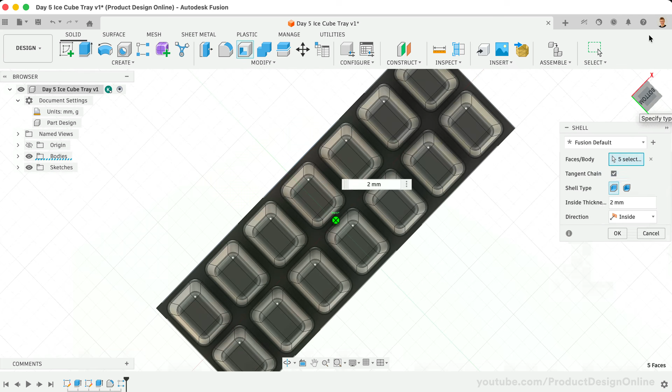I'm Kevin Kennedy, and this is day 5 of Learn Fusion in 30 days. Today, you'll learn a secret trick with the shell command, how to remove material from 3D objects, and how to taper an extrude. Let's get started.

Start with a new part design file and save your design. For some projects, such as this ice cube tray, you may find it easier to start with a 3D block, then remove material to create the final shape.

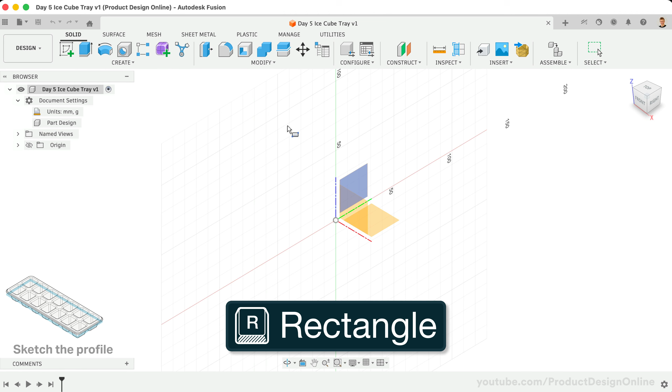Activate Rectangle with the shortcut letter R for Rectangle. Select the bottom origin plane, as we'll sketch this ice cube tray from a top view. Switch to the center rectangle type in the sketch palette. This allows you to start from the center origin. Later in this lesson, you'll see that using the center rectangle allows you to leverage the origin planes to sketch the outer lip of the tray.

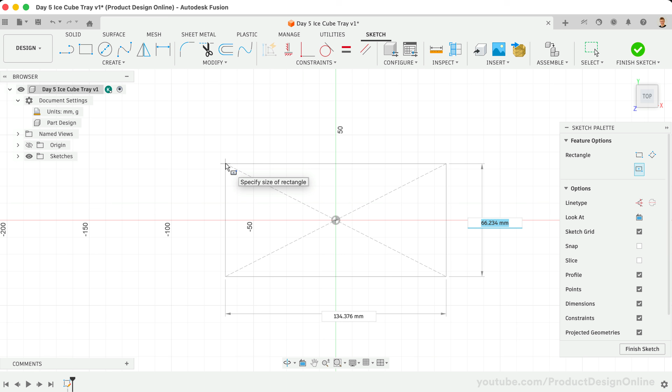After clicking the origin to start the rectangle, type 104 mm for the width, press Tab to switch inputs, and type 300 mm for the length. Click to place the rectangle.

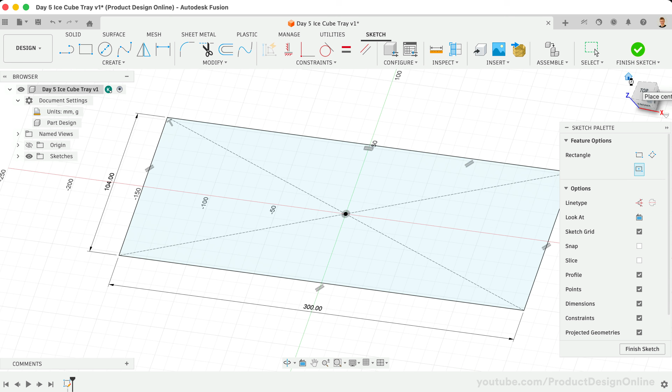View the model from the home position so you can see the extrude. Activate Extrude from the Solid toolbar or with the shortcut E for Extrude. Define the distance as 50 mm. This will represent the overall height.

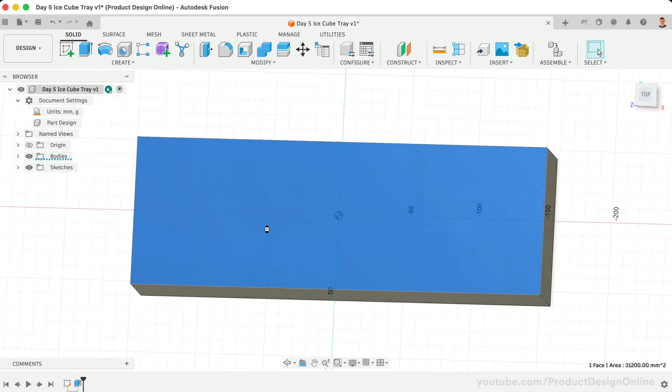We're now going to create the first ice cube cutout, allowing you to pattern the remaining ones. Right-click the top surface and select Create Sketch. Activate the Rectangle tool again, but this time leave it as the 2-point rectangle. Start the rectangle without worrying about the location.

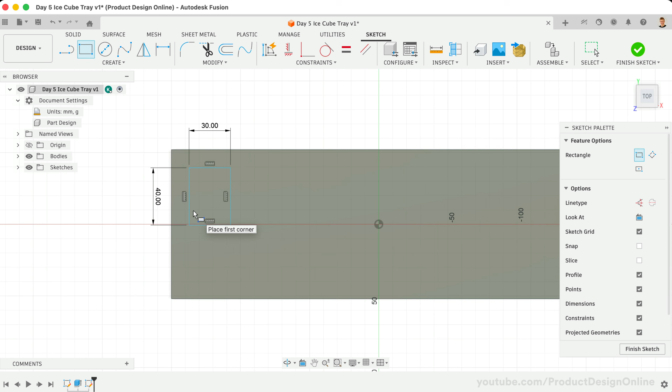Define the height as 40 mm and the width as 30 mm. Click to place the rectangle. Our active sketch is not yet fully defined. Press Escape to clear the rectangle command. Notice you can still click and drag the rectangle.

Use sketch dimensions to precisely place the rectangle from each edge of the tray. Activate the Sketch Dimension tool from the toolbar. A sketch dimension requires you to select 2 sketch curves and then define the distance or angle between them. Select the top of the rectangle followed by the top edge of the 3D body. Remember from the toy block on day 1, you must place the dimension.

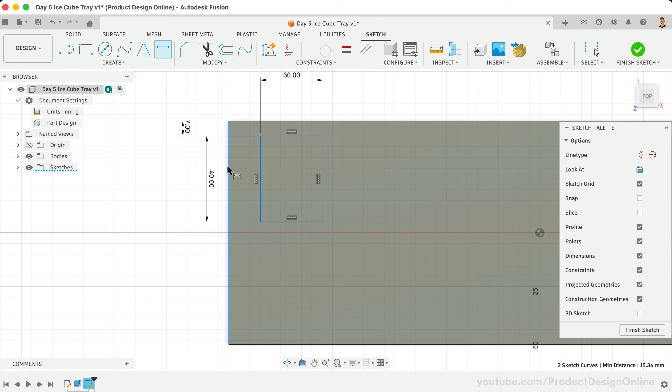Drag your mouse to the left and click to place the dimension. Type 7 mm for the distance. The Sketch Dimension tool remains active. Select the left edge of the rectangle and the left edge of the 3D body. This time, place the dimension above.

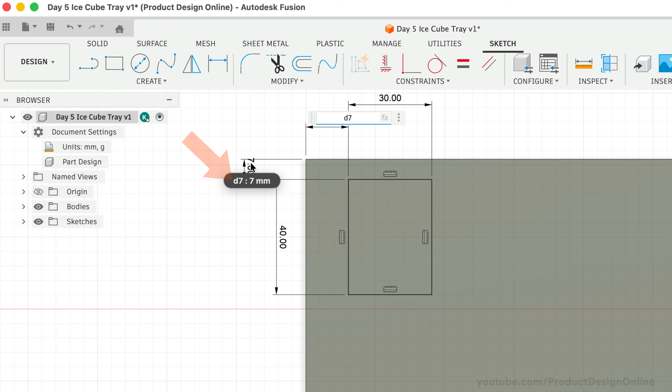Here's a pro tip: in cases where you want the same dimensions, you can select the Other Dimension field. Notice this action fills out the dimension input with D for dimension, followed by a number. This number reflects the sequence in which the dimension was created and can be used to reference the value elsewhere. Press Enter and notice the dimension says FX 7 mm. The FX represents a function where the software pulls the 7 mm value from that original dimension.

For example, if you change the left dimension, notice the top changes as well. This works great for achieving a uniform distance between 2 adjacent edges. Leave this set to 7 mm.

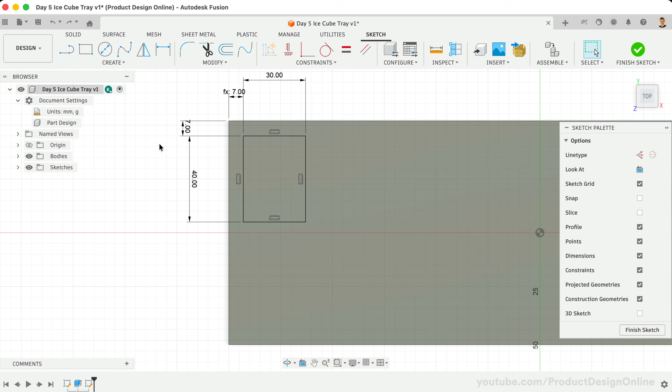We'll now use Extrude to cut this out. Activate Extrude with the shortcut E for Extrude, and view the model from the home position. This makes the extrude easier to see.

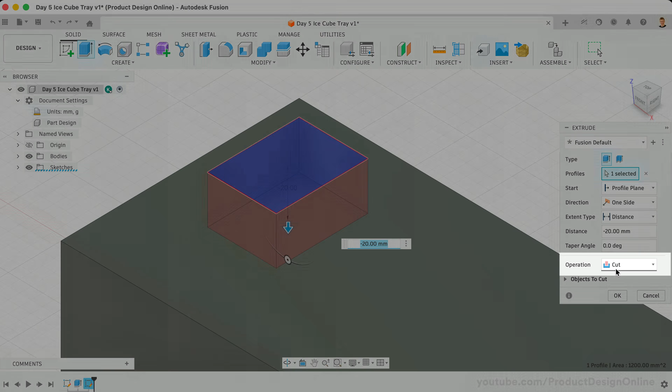Remember, since you have more than one profile, you must select the profile to extrude. If you drag the blue arrow into any existing 3D body, a red preview indicates which area the software will cut away. The operation automatically changes to Cut in the Extrude dialog. You can manually change this at any time if it does not change automatically.

Define the distance as -30 mm. It's very important to keep the minus symbol to make this cut into the existing 3D body. Removing it creates a new 3D body above the tray.

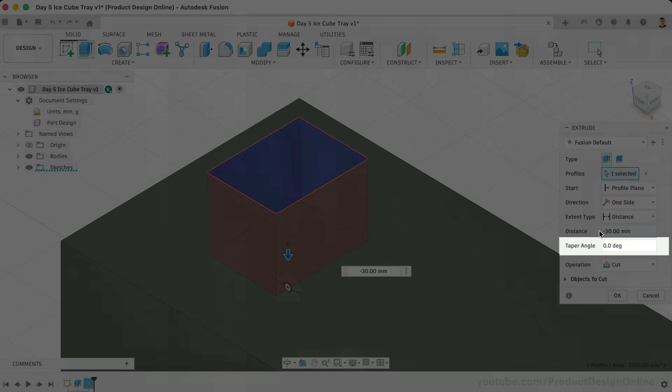In the Extrude dialog, you will find a taper angle. Ice cube trays include a taper angle to allow the ice to fall from the tray. Define the taper angle as -10 degrees. Notice the cube is now tapered on all 4 sides. Click OK to confirm the extrude.

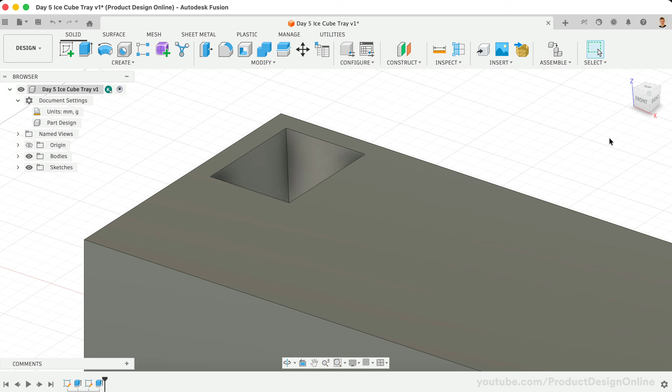Before you pattern the remaining cutouts, add some fillets to include them in the pattern. Activate Fillet and select all 5 inner faces of the cutout. Use the view cube to reorient the model as needed.

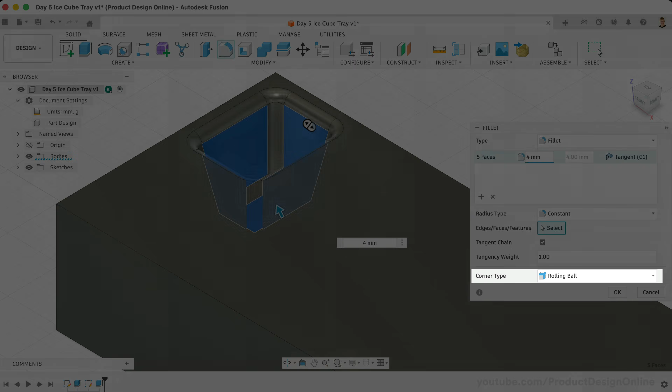Once you select all the faces, define the fillet radius as 4 mm. Ensure the corner type defaults to rolling ball before clicking OK.

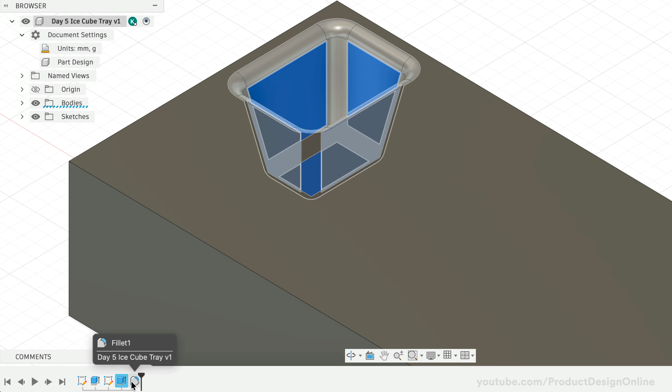Similar to the toy block on day 1, we'll now use the Solid Modeling Rectangular Pattern tool. We'll once again use the Features object type, which allows you to select the extrude and the fillet in the parametric timeline. One important word of caution: use care when patterning objects with fillets. In this case, the project remains simple enough that you shouldn't run into any performance issues. However, patterning many fillets in a large file often causes performance problems.

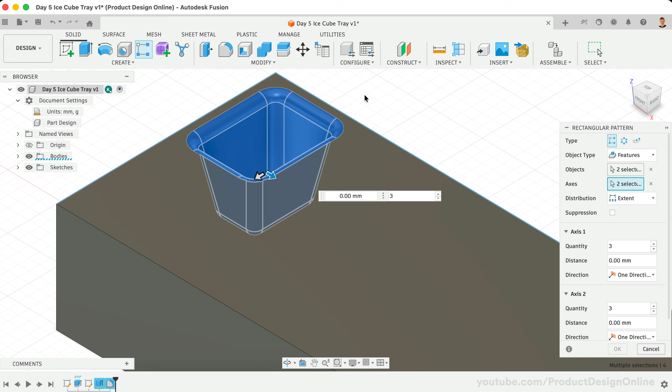For the axis selector, select the 2 edges of the 3D body. Select the long edge first so it becomes axis 1 in the dialog. Click and drag the directional arrows to start the patterns. This is never required, but it makes it easier to verify which direction is axis 1 or 2. You may also find it helpful to view this from the top view and zoom out to see the full model.

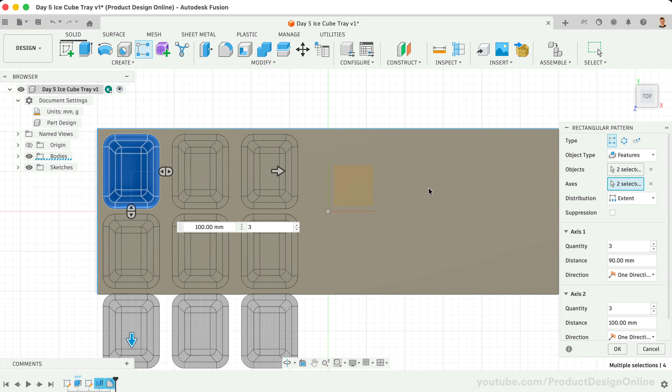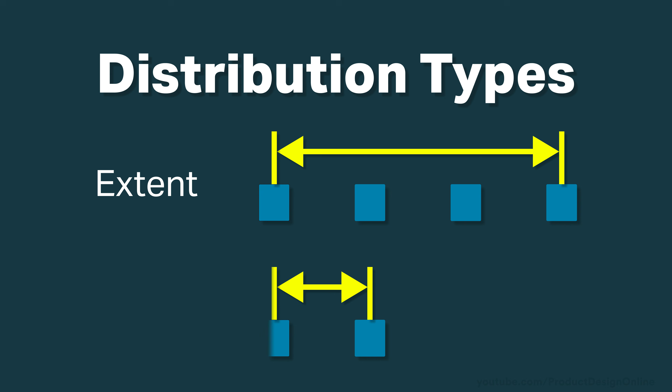For axis 1, define a quantity of 7. Fusion calculates the distribution in one of two ways: the full extent or length of the pattern, or the spacing between each object. Oftentimes, you won't know the distance until you drag the directional arrows. This can take some trial and error.

With the extent option selected, define a total extent distance of 255 mm. For axis 2, set the quantity to 2. The extent distance is 50 mm.

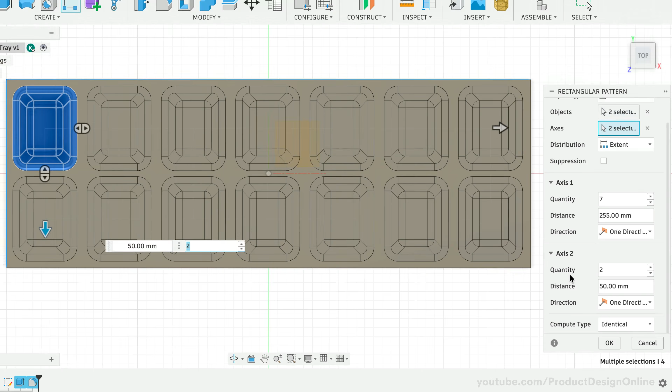Before you select OK, take note of the compute type. This determines how the pattern computes and may affect Fusion's performance. Change this to Identical, which computes the fastest. I've placed explanations of each compute type below this video. Click OK and view the model from the home position.

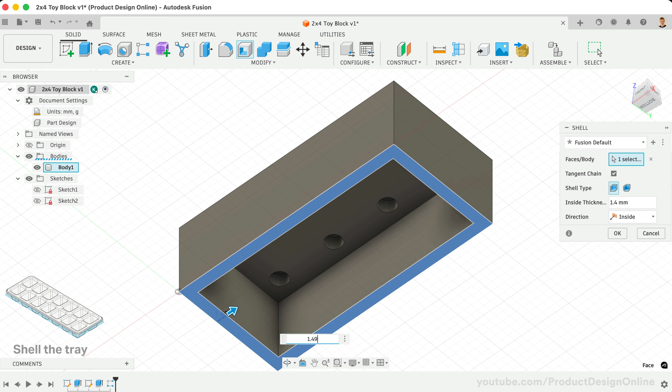It's now time to show you one of the secret or lesser-known ways of using the shell command. On days 1, 2, and 4, we saw how shell hollows out bodies when you select a single face. Many users do not know that you can select multiple faces to perform an exterior shell.

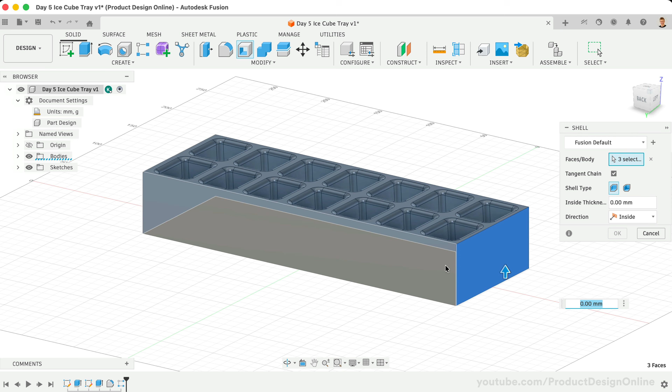Activate Shell from the toolbar. Orbit the model to select the 4 side faces as well as the bottom face. With these 5 outer faces selected, define the shell thickness as 2 mm.

The shell command traces the outer contour of our ice cube cutouts, leaving only the defined thickness. This makes it super easy to create complex shapes. Let me know in the comments if you're surprised by the shell results.

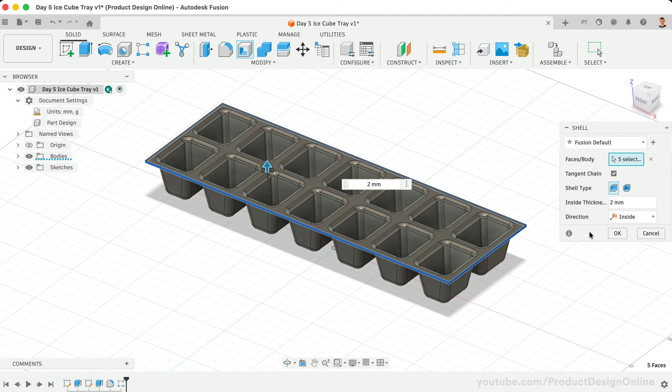To complete the ice cube tray, add a flange to the outer perimeter. We will sketch a profile and sweep it around the outer edge. We need to first round over the 4 corners to create a continuous sweep path.

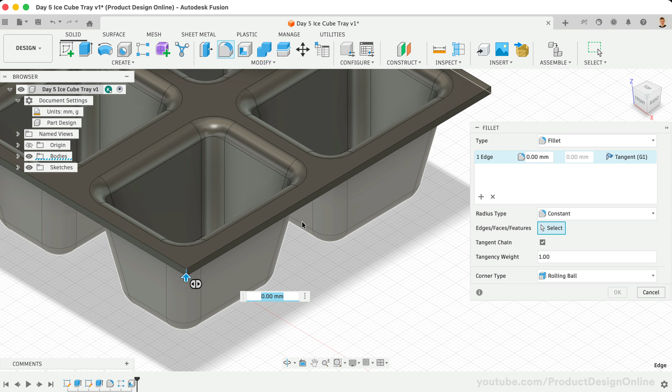Activate the Modify Fillet command and select each of the 4 corner edges. Define the fillet radius as 10 mm before clicking OK.

To sketch our sweep profile, we'll start the sketch where we can snap to the existing edge. To start this lesson, we used a center rectangle instead of a 2-point rectangle. This allows us to leverage the origin plane that runs down the middle of our tray. Toggle open the origin folder in the browser.

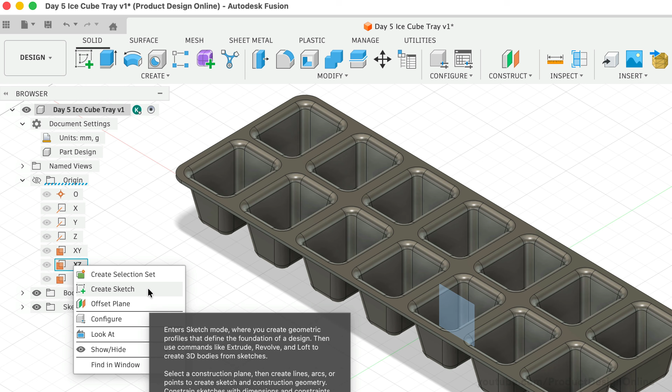Right-click on the XZ origin plane and select Create Sketch. Zoom in on the left side so it's easier to see the sketch.

Activate the Line tool. Start by clicking at the upper edge and sketch a backwards L shape without worrying about the dimensions. However, ensure the automatic sketch constraints keep your lines vertical and horizontal. Fusion should automatically apply a perpendicular constraint to each corner.

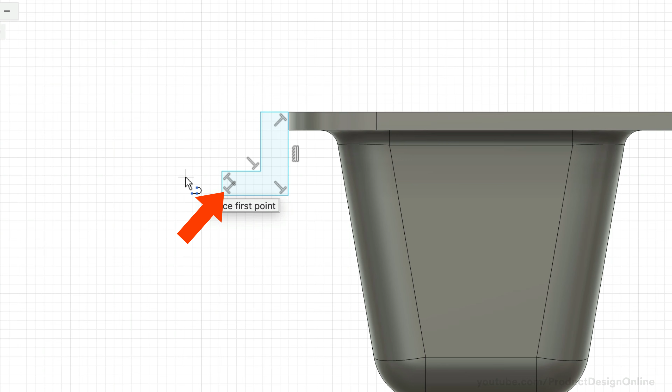Once the shape is defined, our goal is to get the red lock icon in the browser so our sketch cannot move. Activate the Sketch Dimension tool with D for Dimension.

Click the top line, place the dimension, and define it as 2 millimeters. Set the left vertical line to 3 millimeters. You may notice our starting point has moved.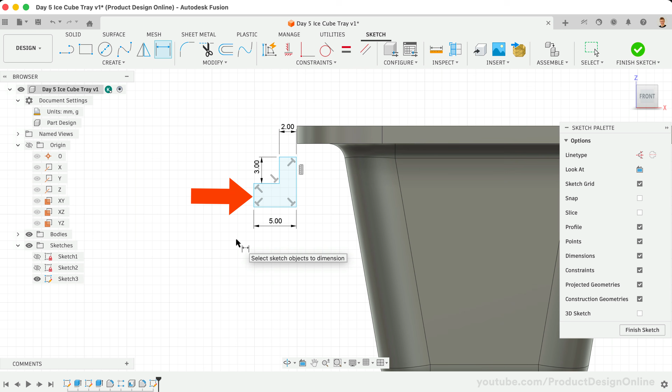We will fix that in a second. Define the bottom line as 5 millimeters. We also want the bottom left line to be 2 millimeters. However, instead of defining another sketch dimension, press Escape to clear the Sketch Dimension tool.

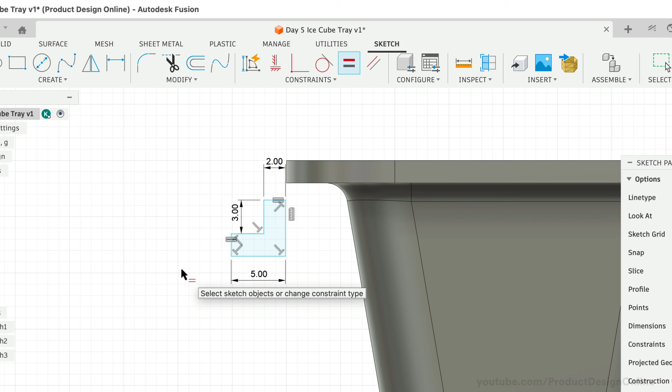Activate the Equal constraint in the toolbar. Select 2 sketch lines to make them equal in size. Select the 2 millimeter line, followed by the desired line. Notice it changes in size to 2 millimeters.

When possible, it's a best practice in Fusion to use constraints over dimensions. This keeps your sketches simpler and easier to maintain. Constraints are a critical concept that we will continue to discuss throughout this course.

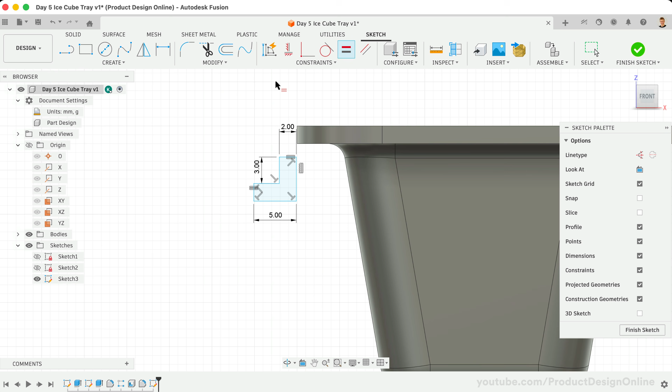Switch to the Coincident constraint in the toolbar. Coincident forces the points to stay together. Select our starting point of the line and the upper edge of the ice cube tray. Notice the entire sketch moves to snap to that edge. Our sketch is now fully defined and we have a red lock icon in the browser.

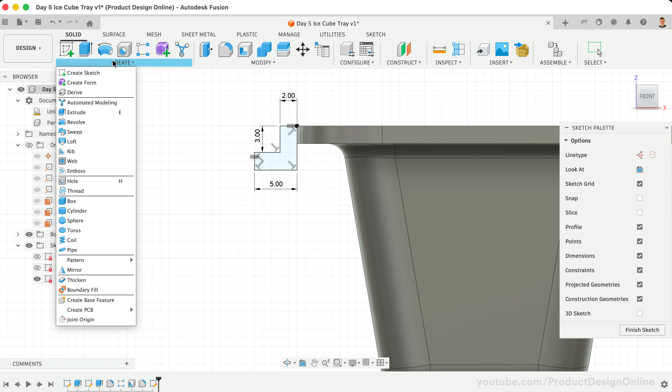Activate the Sweep tool from the Solid toolbar. Select the backwards L sketch profile and view the tray from the home position. Switch to the Path selector.

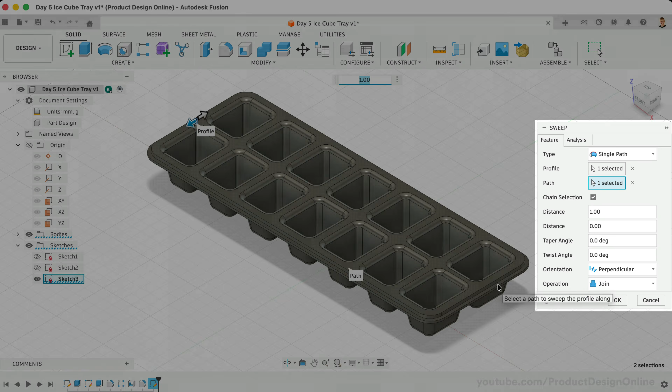For a sweep path, you can often select the existing edge of a 3D body instead of creating a sketch. Ensure you check Chain Selection, which allows you to select the entire edge with a single click. Double-check that the profile sweeps all the way around the model and that the operation joins the existing 3D body.

Click OK and let's activate the Fillet tool. Apply a 1 millimeter fillet to the 4 edge lines around the outer contour, rounding over the sharp edges.

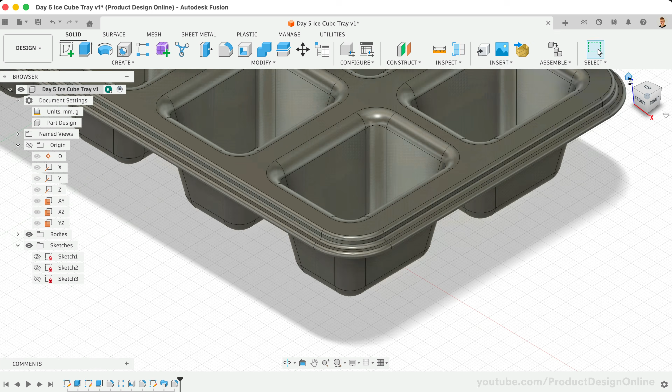Great job completing the ice cube tray. I'll see you on day 6, where I'll show you how to create geometry even faster using midplanes.